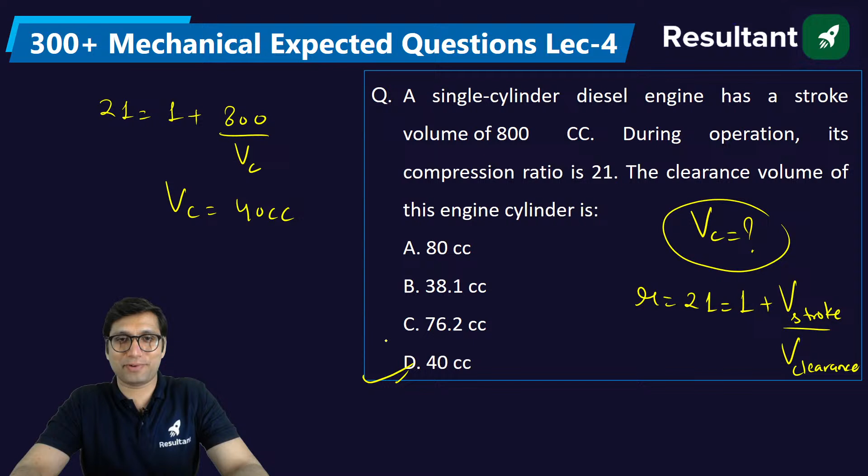But trust me, today I have got really nice questions, really good questions. You will definitely enjoy today's session. The questions I have selected for today's session, in the PPT, are very good - you are definitely going to learn something in today's session.

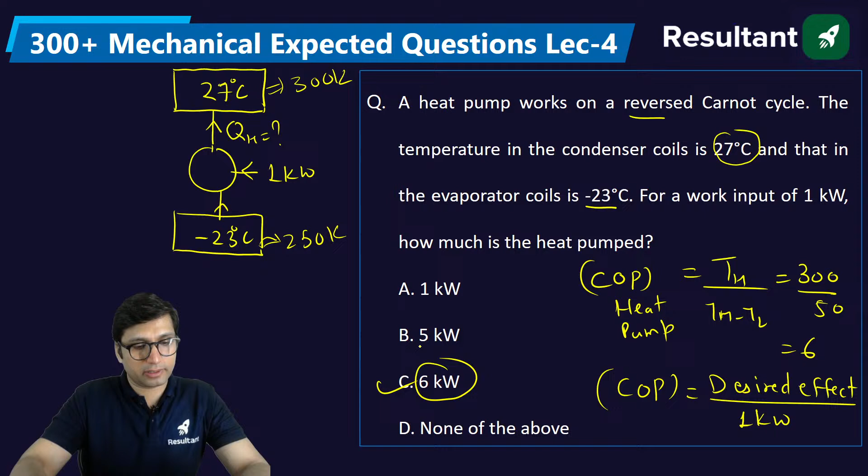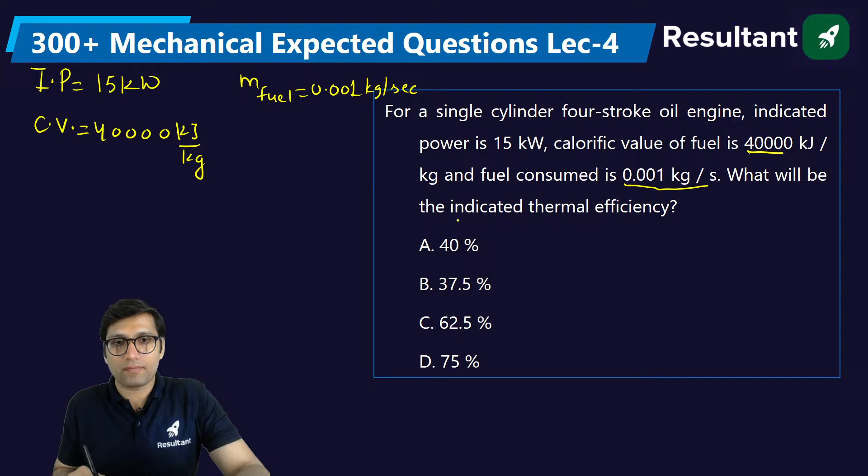What is the indicated thermal efficiency? So how do we solve this question? Indicated thermal efficiency is equal to indicated power divided by mass of fuel multiplied by calorific value.

And I don't feel shy in telling anything to you, because I believe that you should be honest with at least one person in your life, and especially with the students — we should be honest with the students.

So mass of the fuel is 0.001 and calorific value is 40,000. But when you try to solve this question, you will not get the right answer directly — this is in kilojoule per kg, this is in kg per second, this is in kilowatt. Ideally there is no problem in that. If you multiply with 100%, you should get the indicated thermal efficiency. Are you getting this value?

I'm very positive that this platform will grow, and it's a new platform. Students will come to know that classes are being conducted, and slowly this will also grow. I'm very confident about this.

So the answer will be 37.5%.

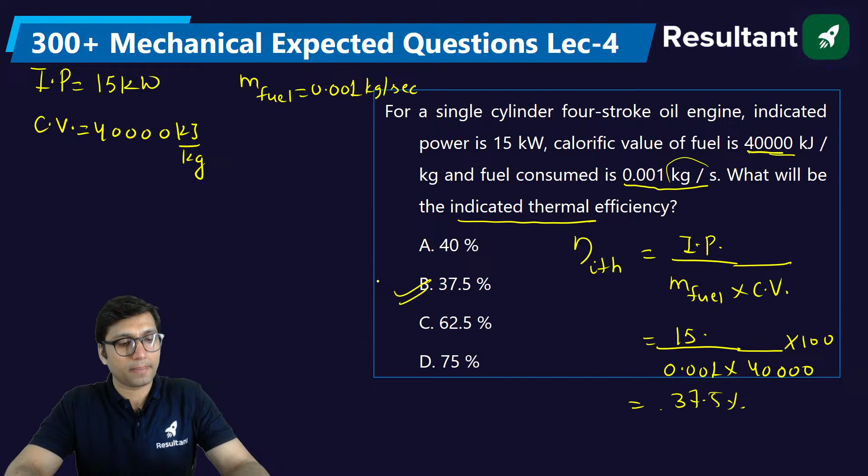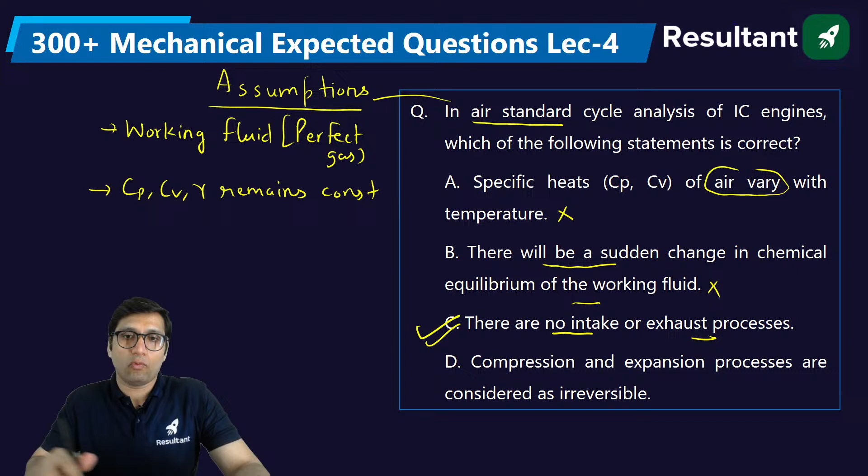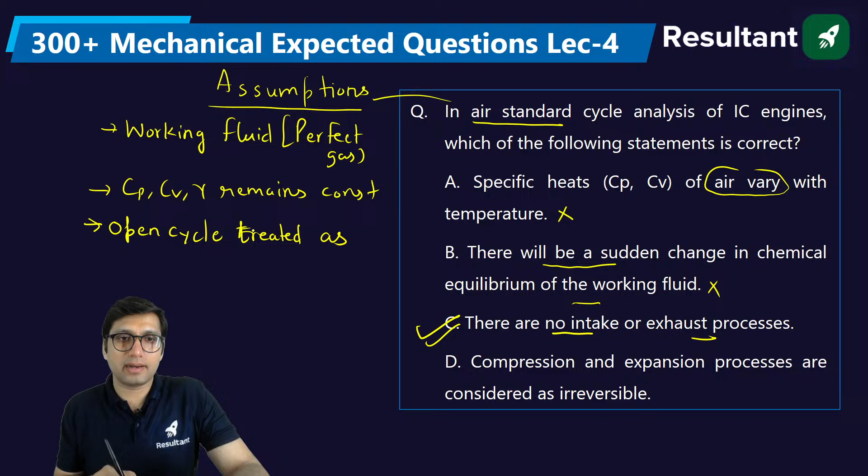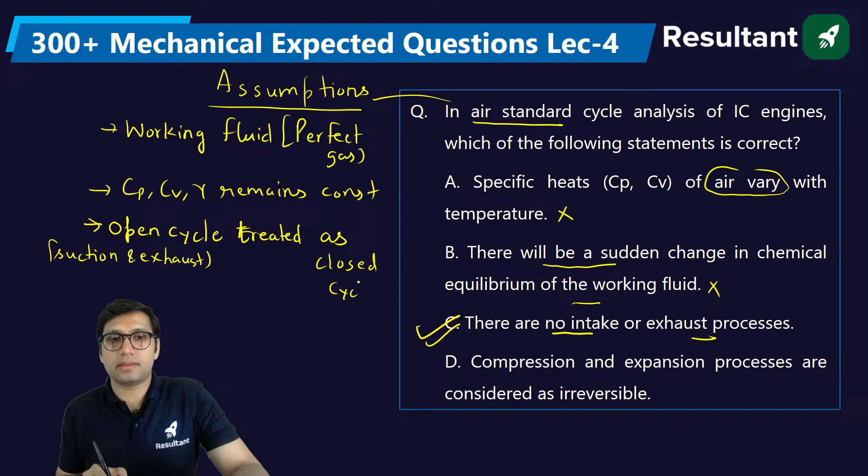There are no intake or exhaust process - yes, intake and exhaust process are not considered here. In the case of air standard cycle, we make an assumption that although the IC engine cycle is an open cycle, it is treated as a closed cycle. That means we will not consider, although in the actual engine there will be suction and exhaust, in the air standard cycle we consider it closed. Open cycle has a process of suction and exhaust, but these processes will not be considered here - treated as closed cycle in the air standard. This is also an important assumption.

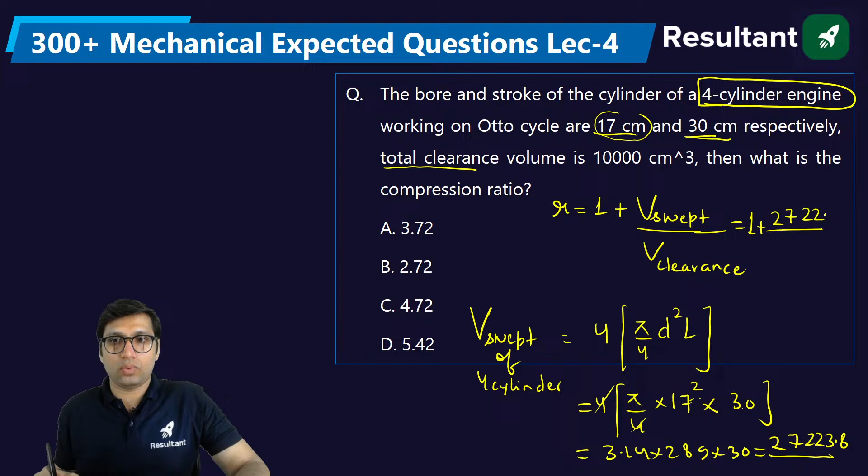Tell me everyone, what will be the value? You will get this value as 27223.8 centimeter cube. So this will be 1 plus 27223.8 divided by 10,000. If you solve it, you will get the answer, which is 3.72.

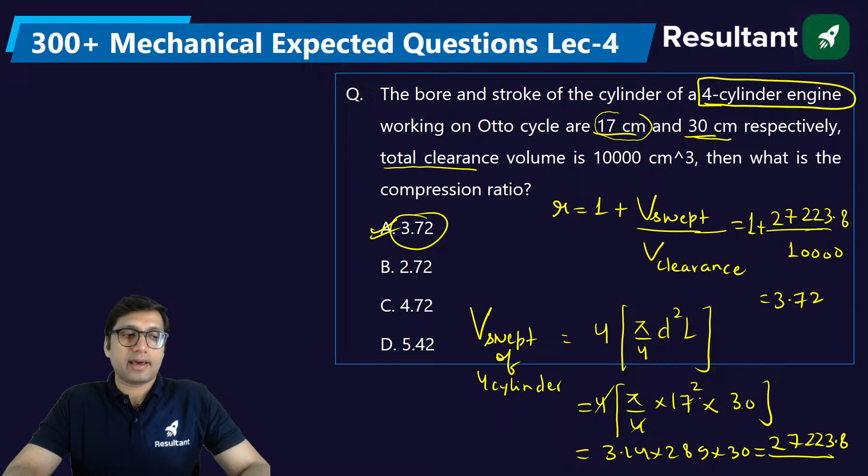For a 1-ton refrigeration plant having the coefficient of performance as 4, what will be the rate of heat rejection by the condenser? You have to find the heat rejected by the condenser.

For 1-ton refrigeration, they are asking you to take 1-ton refrigeration as 3.5. Matlab they are saying you can use it. Most of you already know that 1 ton is equal to 3.5 kilowatt or 210 kilojoule per minute, right? That is the value of 1-ton refrigeration.

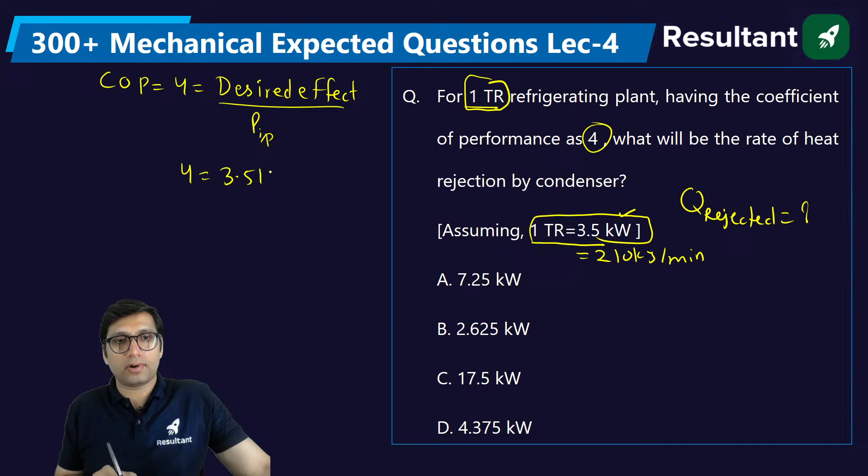For a 1-ton refrigerating plant, the COP is given as 4. What is the rate of heat rejection? So COP is 4, and COP is equal to desired effect, which is refrigeration effect, divided by power input. Desired effect here is 1-ton refrigeration, which is 3.5 kilowatt, divided by power input. First of all, you will get power input from here. Once you get power input, heat rejected is equal to power input plus refrigeration effect. Let's put the values. Tell me what answer you are getting.

Some of you are getting option D. Okay, let me check also. See, if you know about me, I don't do any type of calculation before coming here. Before the session, I don't solve any numerical or any question. I do one thing, I prepare the PPT. So just a second. Yeah, 4.375 is the correct answer. So those who have given 4.375 as the answer, that is absolutely correct.

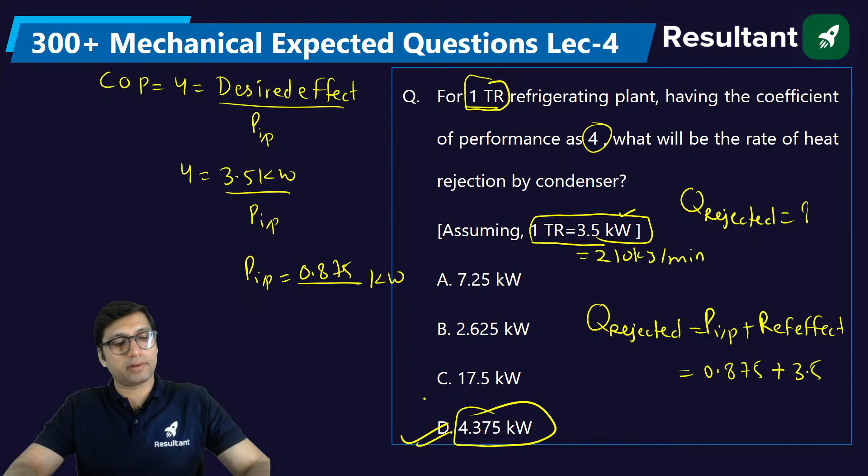Very good, next question. Which of the following increases during sensible heating of the moist air? When we do sensible heating, you will say, sir, what's the problem, you have so many years of experience, even without solving the question you can know. Yeah, that's not a problem, but I have to check, I don't know the right option for sure. I can know the right option for a theory question by seeing the options, but not for a numerical question. I have to solve it. Which of the following increases during sensible heating?

What is sensible heating? In the field of psychrometry, which is a part of air conditioning, sensible heating is the process of increasing the dry bulb temperature at constant specific humidity. When the specific humidity, or moisture, is kept constant, and we try to increase the dry bulb temperature, that is sensible heating.

So what will happen during sensible heating? About relative humidity, you know that simple concept: if it is any kind of heating, the relative humidity will decrease. It will decrease. Here it is asking which of the following will increase, so relative humidity will decrease, so this will not be the answer. Humidity ratio is specific humidity, other name of humidity ratio is specific humidity, and I have already told you that specific humidity remains constant. So this will not be the answer either.

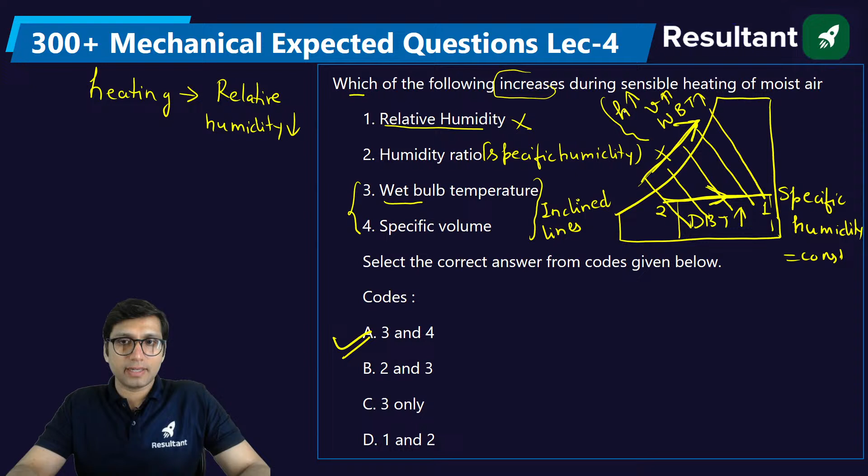And when we are talking about all the properties, why not talk about dew point temperature? If specific humidity is constant, then dew point temperature will also be constant. So this will be the effect on all the properties.

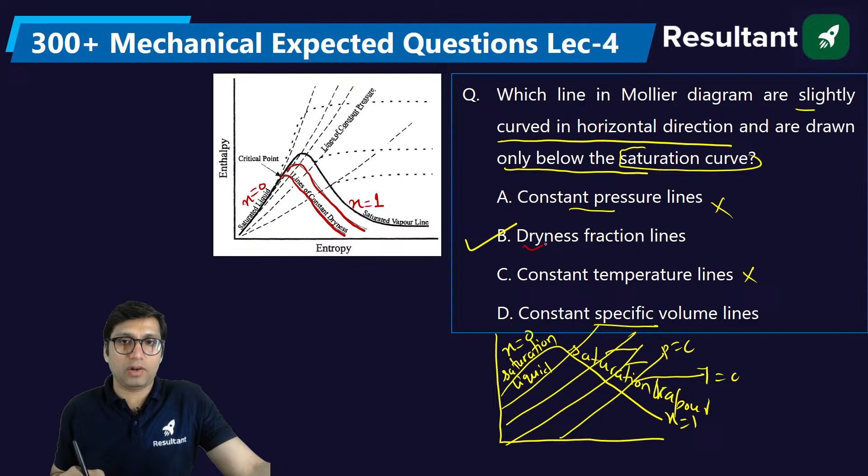So these two will not be the answer. Specific volume lines also extend above, so only one thing is left, that is dryness fraction. If you know the concept, dryness fraction is 0 here and 1 here, so these dryness fraction lines are definitely curved lines. You can see these are the lines of constant dryness fraction. They will only extend below the saturation curve, because the maximum value of dryness fraction is 1, this is the saturated vapor line, and the minimum value is 0. So obviously it will lie below the saturation curve. The answer will be option B.

Which of the following is not an example of forced vortex flow? What is the meaning of vortex flow? You must have seen the formation of these kinds of vortices, there are so many practical examples. You must have seen this formation of vortices in your wash basin also. In the washing machine you find forced vortex, but in the wash basin you will find free vortex.

Very similar to that, which is not the example of forced vortex will be what? Basically they are asking for the example of free vortex. What is free vortex? What is the basic difference between free vortex and forced vortex? What is vortex? The rotational motion of the fluid like this, this is the vortex formation.

What is free? Free vortex means no energy is given, no energy is supplied for rotation of the fluid. This rotational motion, which is in the form of a spiral, happens with no energy supplied. But in forced vortex, some external energy or external work is required and supplied for creating the vortex. It will not happen naturally.

Now of all the options given: the flow of liquid inside the impeller of a centrifugal pump, this is forced vortex. The liquid contained in the cylinder rotated about its axis, because the cylinder is rotated, this is also forced vortex.

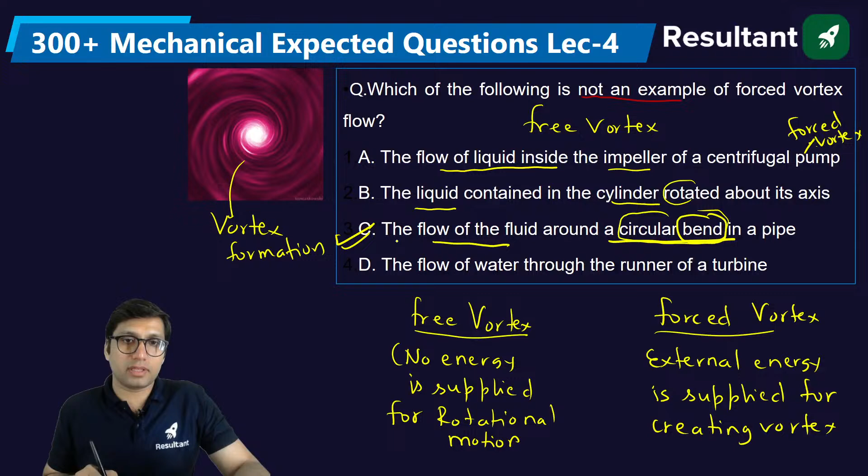Flow of water through the runner of a turbine is forced vortex. If the specific heat of dry air and water vapor are 1 kilojoule per kg Kelvin and 1.88 kilojoule per kg Kelvin, and the humidity ratio is 0.011, then the specific heat of the moist air will be?

The moist air is basically the sum of dry air and water vapor. It is composed of two important constituents: water vapor, which is known as moisture, and dry air, which is normal air. Now you must have read this formula for finding the specific enthalpy of the moist air.

You must have seen this formula: specific enthalpy of dry air plus specific humidity into 2500 plus 1.88 into dry bulb temperature in degree Celsius. Dry bulb temperature has to be kept in degree Celsius, but this is the formula for finding the specific enthalpy of the moist air.

But here they are asking for the specific heat of the moist air. The specific heat of the moist air will be somewhat like this: specific heat of dry air plus specific humidity into specific heat of water vapor. Actually, this formula for specific enthalpy of moist air can also be written as specific enthalpy of dry air plus specific humidity into specific enthalpy of water vapor, it is very similar to this.

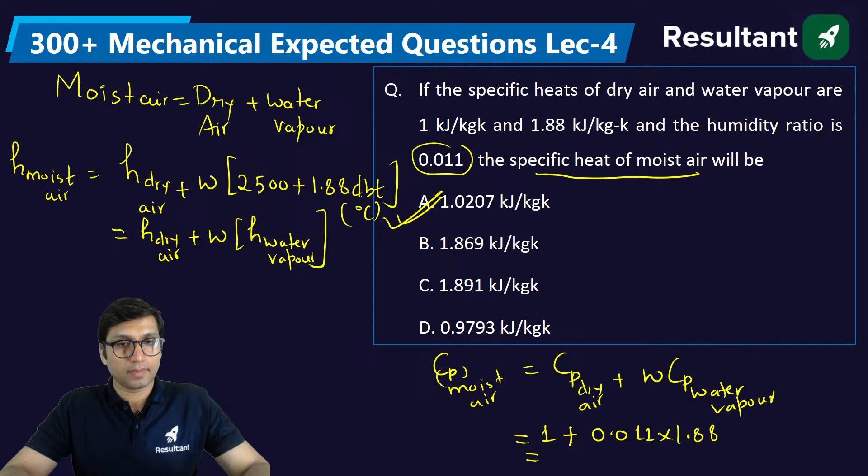Next question. Which of the following statements are correct when related to thermodynamic system?

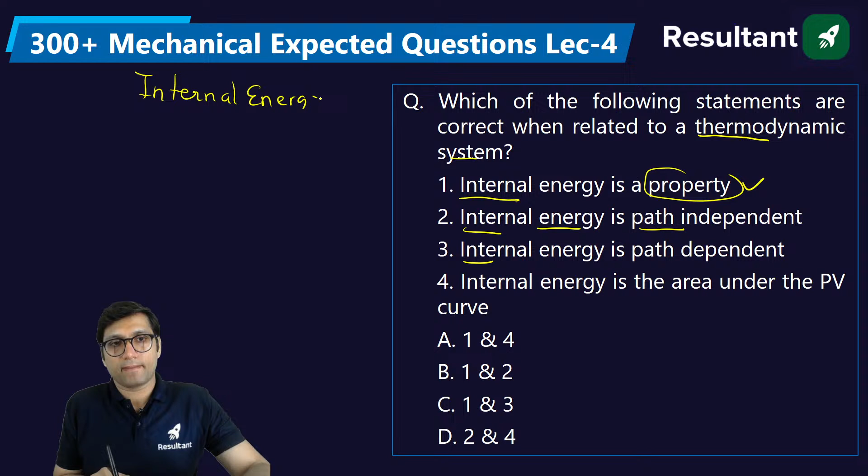For a thermodynamic system, they are talking about internal energy. We all know internal energy is a property. Yes, correct, internal energy is path independent, because internal energy is not a path function, it is a point function or state function. It depends only on the initial and final states. It does not depend on the path followed by the system.

For example, if you see a pressure volume diagram, let's say there is a process 1 to 2 through path A, and also process 1 to 2 through path B. If you find the change in internal energy for path 1A2, it will be U2 minus U1. If you find the change in internal energy for path 1B2, it will also be U2 minus U1. It is not dependent on the path, only on the initial and final points, so it is path independent. The answer will be 1 and 2, option B. Clear?

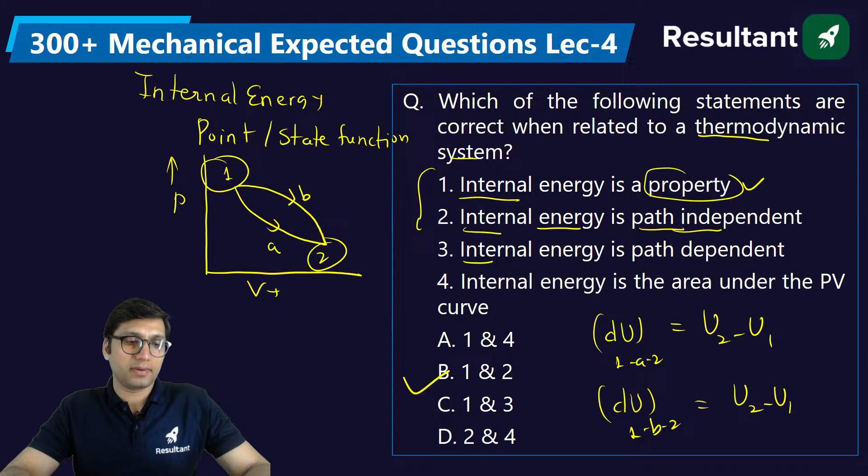Path dependent properties are not properties. Path dependent quantities are heat and work. They are path dependent, and they are determined by the area under the PV curve. Work is determined by the area under the PV curve.

Air is cooled sensibly from 40 degrees Celsius dry bulb temperature and 29% relative humidity to 24 degrees Celsius dry bulb temperature. What will be the bypass factor of the cooling coil if the surface of the cooling coil is maintained at a temperature of 20? This question may look a little tricky because of the kind of data given. But it's not confusing, my dear, this is a very simple question.

We are having a cooling coil, and when air at an initial temperature of 40 degrees Celsius passes through the cooling coil, its temperature gets reduced to 24 degrees Celsius. The temperature of the coil is 20 degrees Celsius. So whenever you have to find the bypass factor of a cooling coil, obviously the highest temperature will be the inlet air temperature, the exit temperature will be the second highest, and the lowest temperature will be the coil temperature.

Bypass factor of the cooling coil will be T2 minus temperature of the coil, over T1 minus temperature of the coil. Just solve it, you will get the answer. Tell me what value you are getting. Are you getting option A, 0.2? Okay, so this is the bypass factor.

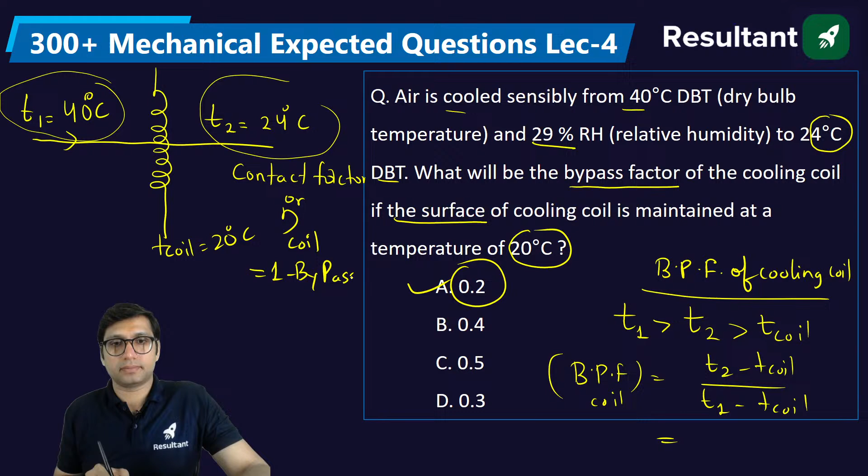But what if they ask you the value of contact factor or coil efficiency? If they ask you the value of contact factor or efficiency of the coil, that is equal to 1 minus bypass factor. Remember this.

Now if you see this diagram, there is a shear stress and velocity gradient curve given here, with different names of different types of fluid: Bingham plastic, ideal fluid, shear thickening fluid, pseudoplastic, thixotropic. Now the question is, you have to match the following. If I were at your place, I would directly say this is thixotropic because I know the answer, this is dilatant, this is Bingham.

And if you are able to match from this diagram, then it's fine. C will be 1. Where is C1? That is this. These two will be the answer, so options C and D will not be the answer because Bingham plastic is this. Shear thickening fluid is dilatant. Dilatant is shear thickening, B is 3, so option A will be the answer.

But my dear, shear thickening is dilatant, dilatant is shear thickening, and pseudoplastic is shear thinning. Thixotropic is time dependent shear thinning. It is also shear thinning, but time dependent shear thinning.

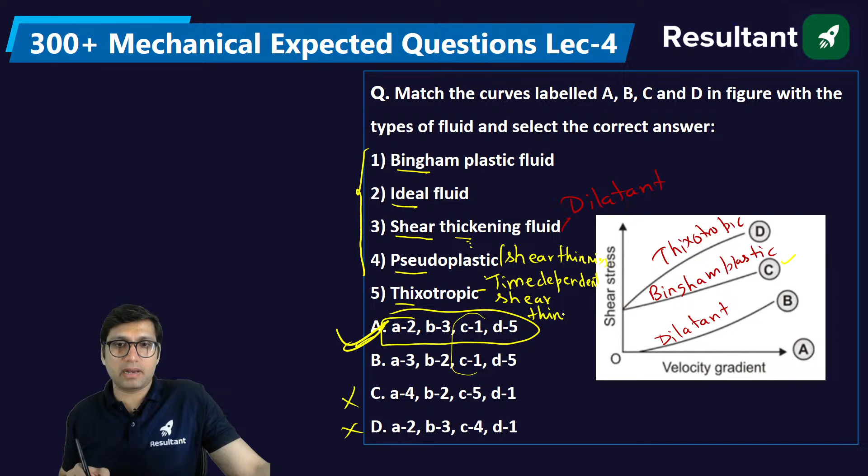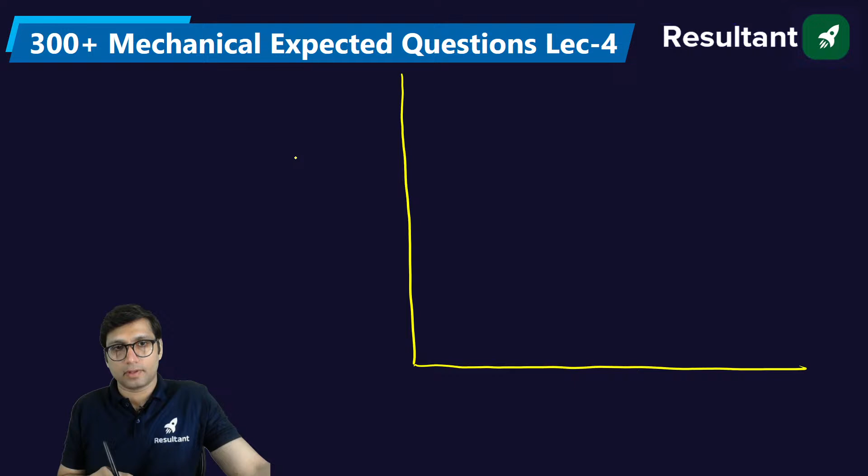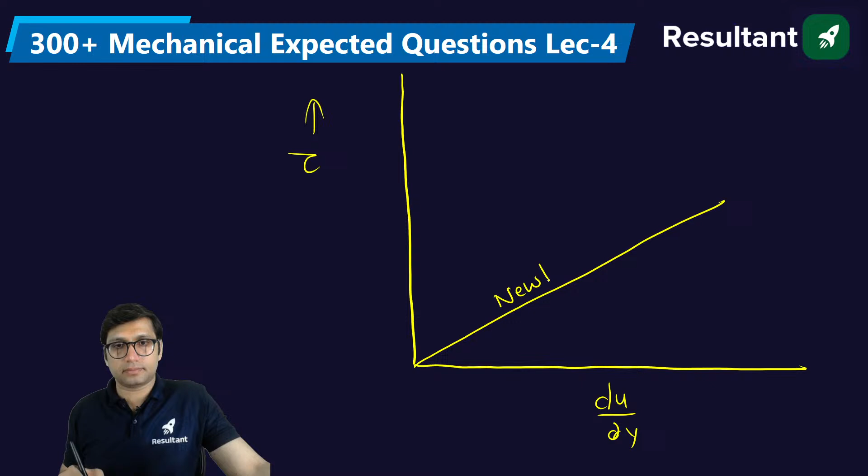So let me draw a diagram of all the fluids here: shear stress and velocity gradient. This curve is Newtonian fluid, it will be a curve like this. For Newtonian fluid, N will be equal to 1 and B will be equal to 0. What is B? I will tell you after some time. This is dilatant, for dilatant N is greater than 1, and this is pseudoplastic.

Pseudoplastic, N is less than 1. Pseudoplastic is shear thinning. Now, from this point up to this point, this is B. B is nothing but this is called yield stress.

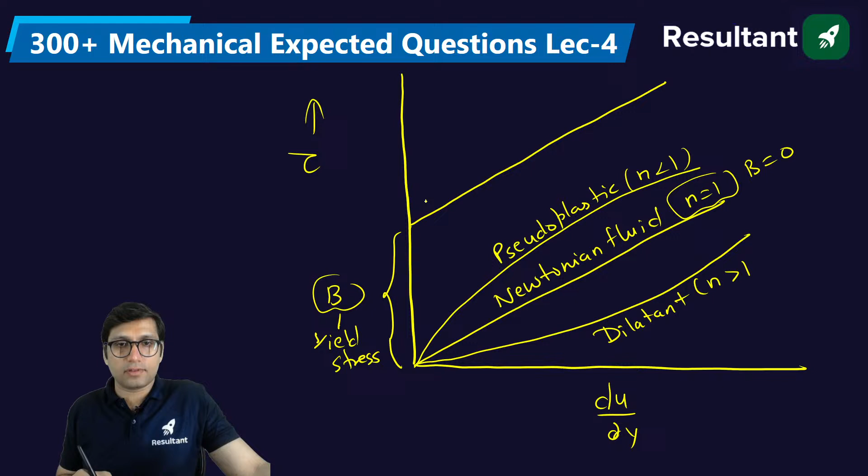This is the minimum yield stress required. This is Bingham plastic, ideal plastic. There are two more curves here: this is thixotropic and this is rheopectic.

For rheopectic, n will be greater than 1, but B is not equal to 0. Here B is equal to 0, B is equal to 0, B is not equal to 0 and n less than 1. Clear? For Bingham plastic, B is not equal to 0 and n equal to 1. So this is the behavior of all the curves I have shown over here.

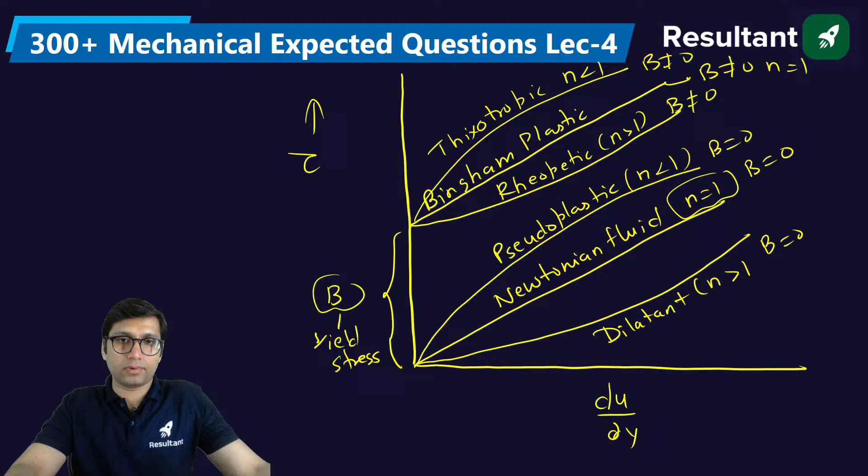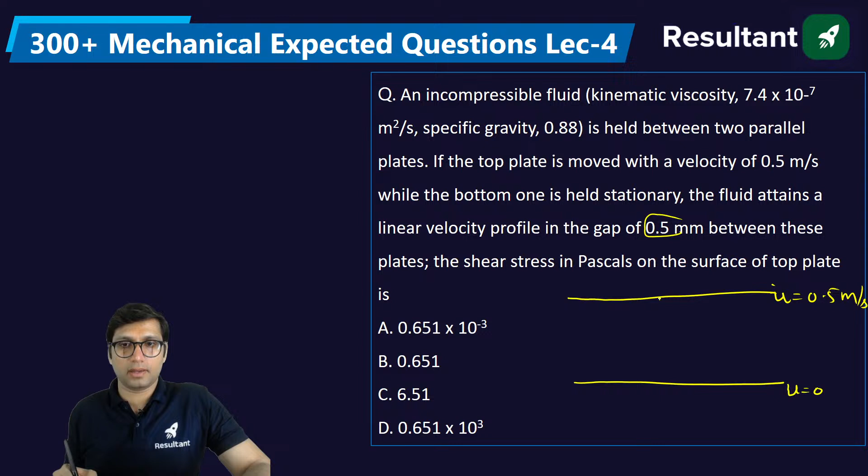Next question: an incompressible fluid, kinematic viscosity and specific gravity given, is held between two parallel plates. The top plate moves with a velocity of 0.5 meter per second, while the bottom one is stationary. The fluid attains a linear velocity profile in the gap of 0.5 mm between these plates. So basically we have two plates, the top moving at 0.5 m/s, the bottom stationary, with a distance of 0.5 mm between them.

You have to find the shear stress. Shear stress can be determined by mu du by dy, a simple formula. Here they have given kinematic viscosity and specific gravity, and you know shear stress is equal to kinematic viscosity into density into du by dy. What is density? If the specific gravity is 0.88, density will be 880 kg per meter cube.

Kinematic viscosity is given, everything is given, just put the values. Du will be the difference of the two velocities, 0.5, and dy will be 0.5 times 10 to the power minus 3 meter. Just put all the values here and tell me the answer. Okay, very simple question.

I'm also solving the question because, as I told you, I don't solve the question before coming to class. So just give me a few seconds. Maybe your speed will be better than mine because I usually don't solve these questions.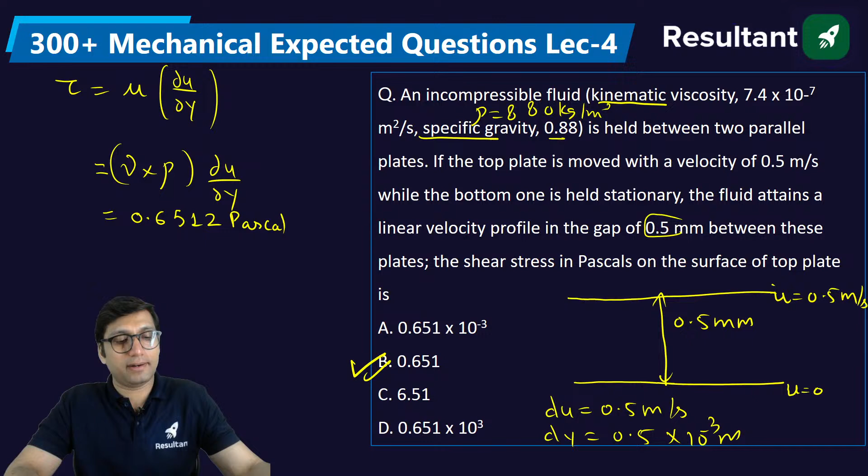It looks like some students have left the YouTube session. Maybe they have other appointments, maybe dinner with a loved one, or a phone conversation, or something more important. But those who have stayed for 44-45 minutes, thank you so much. It's a free session, it's your free will to come or leave, I can't stop you. But we give 1 hour to these sessions, and for mechanical only one session is conducted in a day, at 8 p.m., a time suitable for all types of students, whether working, in college, or preparing full time. Even after that, if you can't continue studying for 1 hour, God knows what you guys want to do.

Two Carnot engines working between the same temperatures of 600 and 300 Kelvin employ two different working fluids. Sometimes questions look like they have written so many complicated things to make it seem difficult. One uses a fluid of specific heat 2.302, the other uses 3.2305. When you first read this, you think let me do some calculation, but if you use your brain you'll see the key fact.

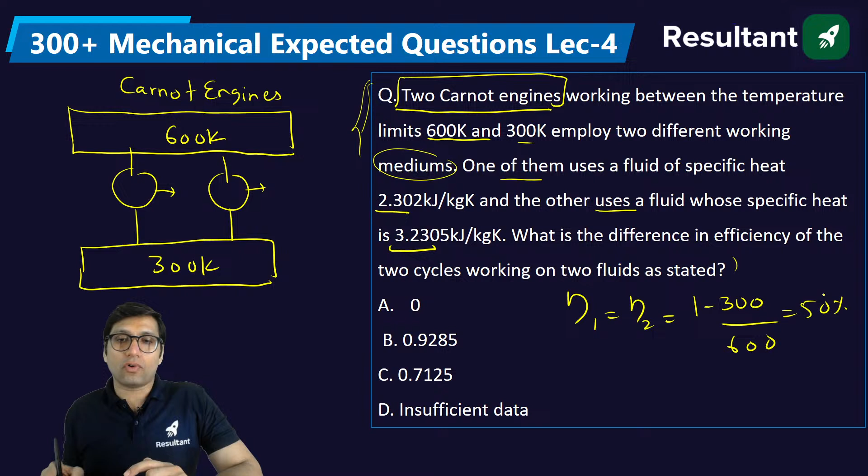Both are Carnot engines working between the same temperature limits of 600 and 300 Kelvin. If both are Carnot engines, their efficiency will be 1 minus 300 by 600, which is 50% for both. So what is the difference in efficiency? The difference in efficiency will be 0. That's a simple concept.

The velocity component in the x and y direction are given by... let me just write it here.

U is equal to lambda xy minus xy square. Okay, some mistake was there. And v is equal to x square y minus 4y cube.

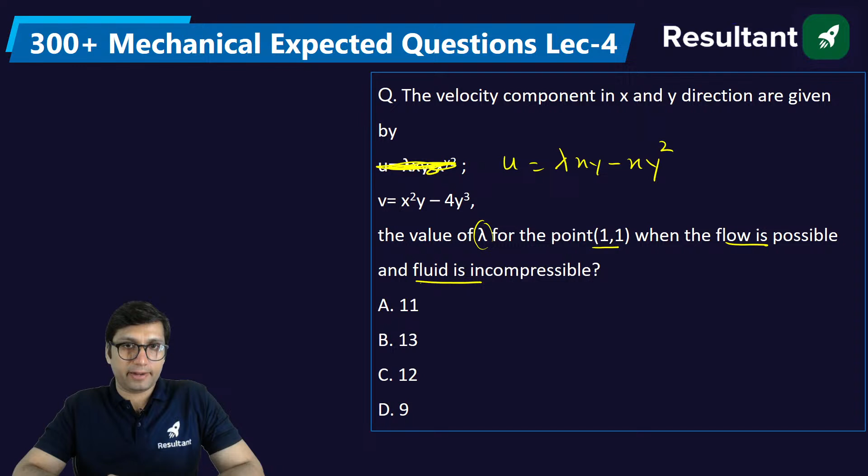The value of lambda for the point (1,1) where the flow is possible and the fluid is incompressible, you have to determine. So when can we say the flow is possible for a two-dimensional fluid where the velocity is varying in x and y direction? This is only possible if the continuity equation is satisfied. Continuity equation, you know continuity equation? If it is satisfied, which is del u by del x plus del v by del y equal to 0.

Only thing you have to do here is del u by del x will be, tell me, it will be lambda into y minus y square. Del v by del y will be x square minus 12y square.

And here they are saying if you put (1,1) means x is equal to 1, y is equal to 1 at these points. At these points, del u by del x will be lambda minus 1. Del v by del y will be 1 minus 12. So just put the value, you will get del u by del x is lambda minus 1 plus 1 minus 12 equal to 0. This will get cancelled out. You will get lambda is equal to 12. Okay, clear?

Subhadeep, how are you getting option B, 13? Some calculation mistake again? Please see your calculation, check. Okay.

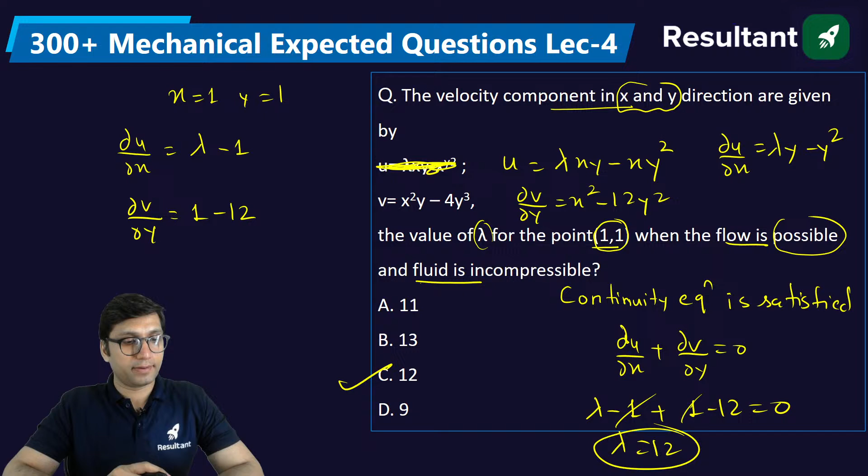All right, following statements are made regarding Bernoulli equation to be applied between any two points along a streamline. Which of these is or are correct? The flow is steady and compressible. The flow is steady, incompressible, and curl of velocity is non-zero.

Bernoulli equation, see, Bernoulli equation and its assumptions are important for your exam point of view. Okay, Bernoulli's equation assumptions. The first assumption makes it quite clear that it should be ideal fluid, and if it is ideal fluid, the flow is inviscid, the flow is irrotational, the flow is incompressible.

All right, can you see anything like that here? Also steady, ideal fluid is also steady. So the answer is steady, incompressible, and irrotational. I think only one option is there. Curl of velocity is non-zero. See, curl of velocity, if it is not equal to 0, the flow will be rotational. Clear? Any confusion? So the answer will be here only R.

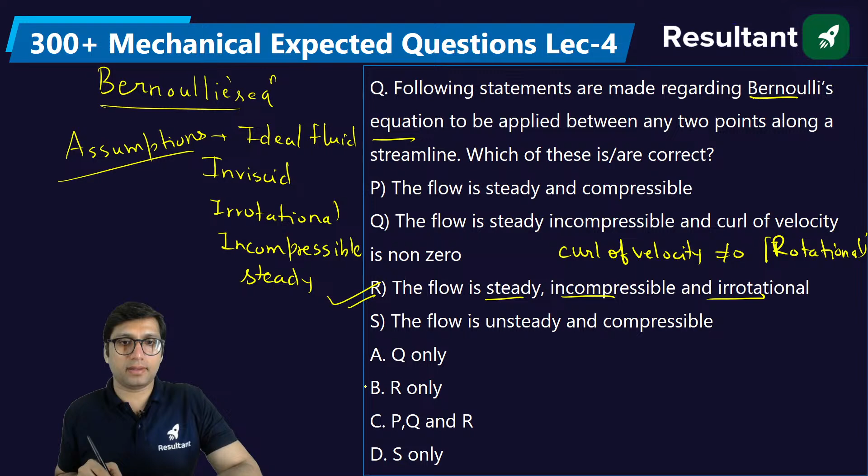Only B. In order to avoid tendency of separation at the throat in a venturimeter, the ratio of diameter of the throat to the diameter of the pipe should be. This is a database question, fixed database question. If you know the answer, then you can definitely answer the question.

Database question. Whenever you find this kind of question, you should have studied before. The answer is 1 by 3 to 1 by 2. That is in order to avoid separation. Which separation are they talking about? Boundary layer separation. In the Venturi meter, in order to avoid separation of the fluid, one thing you require is the angle of divergence should be less than 7 degree.

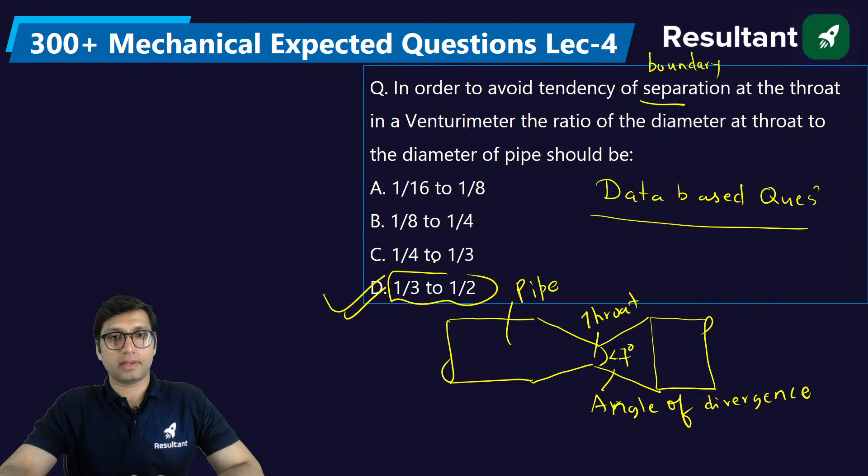Angle of divergence in the divergent part of the Venturi meter should be less than 7 degree. And second thing is that the ratio of the diameter of the throat to the diameter of the pipe should be 1 by 3 to 1 by 2. Next question, you can check that. Okay, this is a database question. This is a very nice question, and

I want all of you to take a few seconds to firstly understand the question, understand what is given, and then try to solve it. A cylindrical body of cross-sectional area A, height h, and density rho s. Here I was not getting the symbol for rho, so this, it is denoted by P, but it is rho. Rho means density. Here it is representing density.

It is immersed to a depth h in a liquid of density rho and tied to the bottom with a string. Clear? So there is a cylindrical body placed in a liquid, and at the bottom it is tied to the bottom of the container with a string. Clear? Understood the question? If you understood the question, tell me what is being asked. The tension in the string. How can you solve this question?

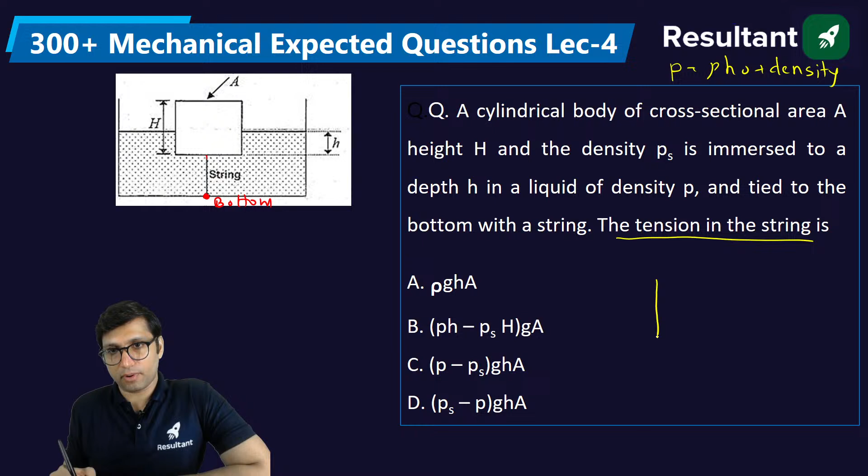This question may look very tough to you, but it's not so tough. First of all, you need to understand this cylindrical body will be having a tension. Now, what is the direction of tension? First of all, what is the direction of the weight? Direction of the weight will be in this direction. Weight of the body will be acting in the downward direction.

What will be the direction of the buoyant force? The buoyant force will act in the upward direction. Now what will be the direction of the tension force? Will it be in the same direction or the opposite direction?

See, if the string is stretching, you realize the string will try to stretch in this direction, but actually on the cylindrical body, the tension will act in this direction. This is the free body diagram of the cylindrical body.

Now, if the tension is in the downward direction, you can say tension T will be equal to buoyant force minus the weight of the body. Correct? Tell me everyone, is it correct or wrong?

What is the weight of the body? Weight of the body will be equal to density of the body, rho s, into g into height of the body, into H into A.

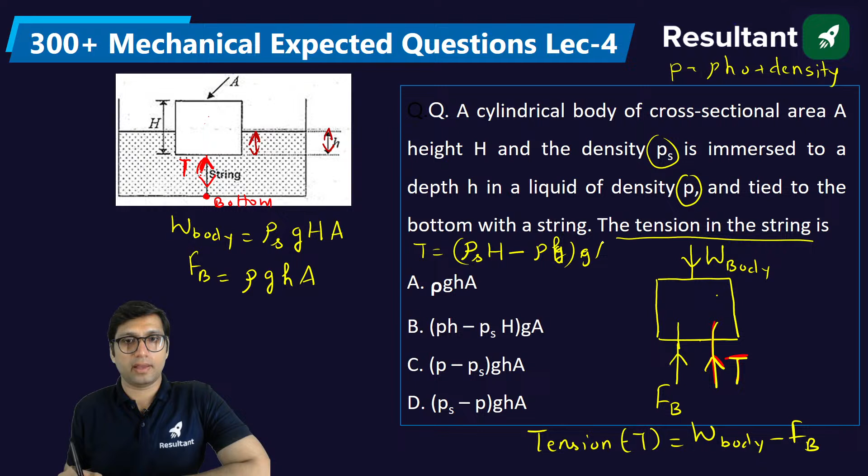So the tension will be equal to rho s into h minus rho into g into, sorry, rho into h into g into A. This should be the answer, but I think there is some mistake.

Either I have done some mistake, or the string will try to stretch in this direction. So as per this, I think the direction of tension should be in this direction, taken in this direction. So we'll say tension acts in both directions.

So we can say the buoyant force is equal to tension plus weight of the body. So tension will be equal to buoyant force minus weight of the body. So if this is the answer, it becomes just the opposite: rho into H minus rho S into H. The answer will be option B. Is it clear to everyone?

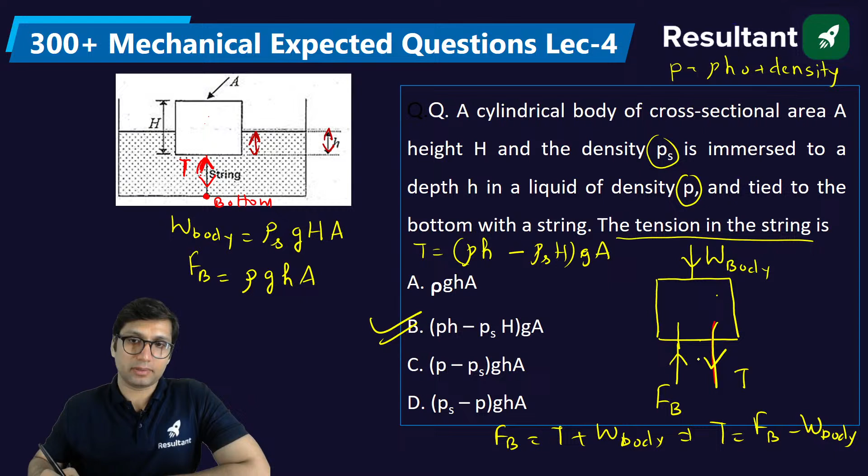Yes, tension will be taken away from the body. Maybe I have not studied mechanics in a long time, so I made a little mistake here. So tension will be taken away from the body, this is a mechanics concept, away from the body.

Very good, next question. A manometer measures the pressure differential between two locations of a pipe carrying water. If the manometric liquid is mercury having a specific gravity of 13.6 and the manometer showed a level difference of 20 centimeters, then find the pressure head difference of water between the two tappings. It's a very simple question.

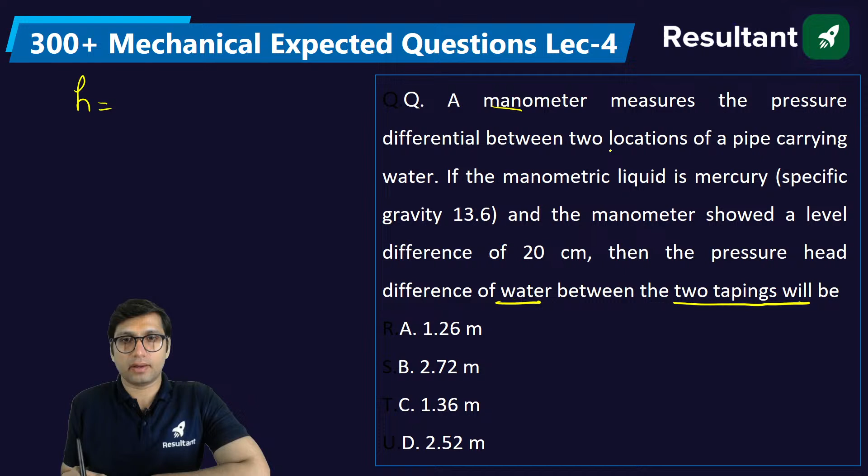The pressure head difference is equal to, since here we have two types of fluid: one is the manometric fluid, mercury, and the other fluid is water. Water has a density of 1000 kg per meter cube and a specific gravity of 1. Since the specific gravity of the fluid in the pipe is less than the specific gravity of the manometric fluid, we'll apply this formula.

H will be equal to X, specific gravity of the manometric fluid by specific gravity of the fluid in the pipe, minus 1. Just put in the values and we'll get the answer. X is 20 centimeters, 0.2, times 13.6 by 1 minus 1. Solve it and you'll get the answer, 2.52 meters.

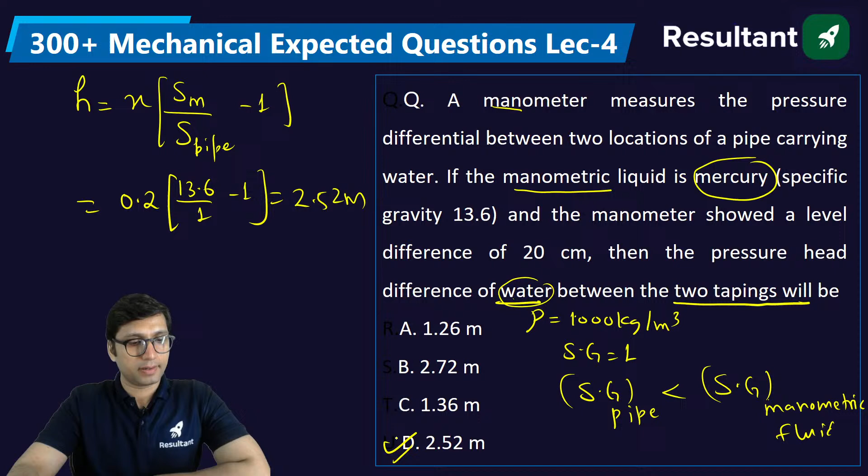Next question, a very similar type of question. The pressure difference measured by a mercury-oil differential manometer on the two sides of an orifice meter gives a reading of 50 centimeters of mercury. Determine the differential pressure head in the orifice. Take the specific gravity of the oil as 0.9.

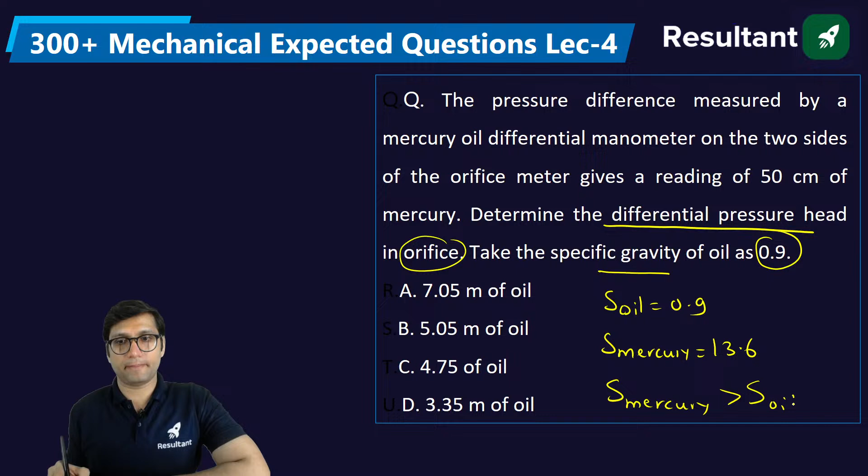Here the specific gravity of the oil is 0.9 and the specific gravity of mercury in the manometer is 13.6. Again, the specific gravity of the manometric fluid is greater than the specific gravity of the oil, so the formula will be the same. It is X, 0.5, times 13.6 by 0.9 minus 1. Solve it and get the answer.

What will be the answer for this question? Tell me, everyone.

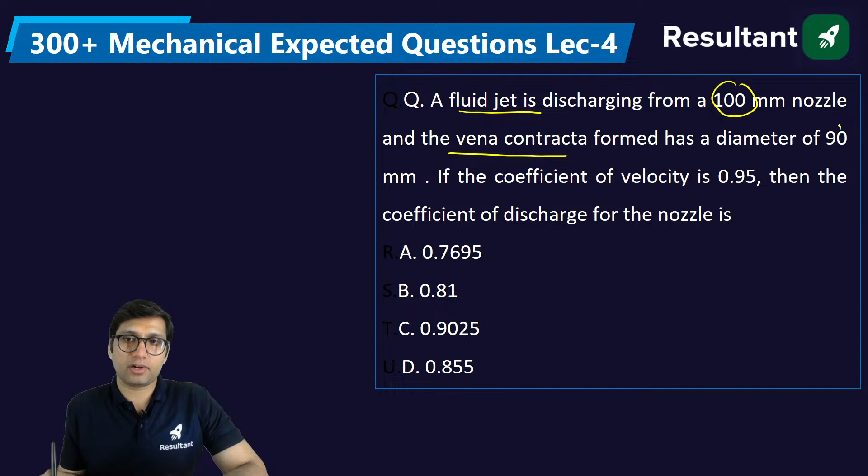A fluid jet is discharging from a 100 mm nozzle and the vena contracta formed has a diameter of 90 mm. If the coefficient of velocity is 0.95, then the coefficient of discharge for the nozzle is?

Coefficient of discharge is equal to coefficient of contraction into coefficient of velocity. You know this formula, right? If you have to determine CD, it will be equal to coefficient of contraction into 0.95. Now the problem is how to find the coefficient of contraction.

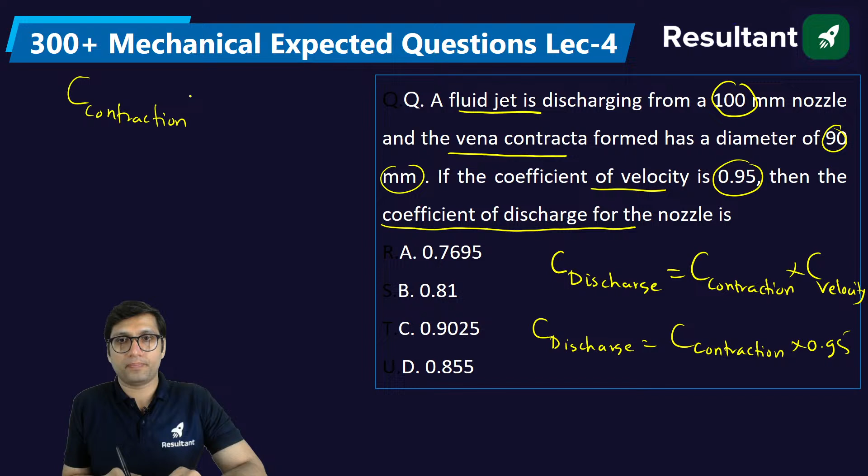Coefficient of contraction is equal to area of the vena contracta, which is the actual minimum area, to the theoretical minimum area, which is the area at the exit of the nozzle, that is area of the nozzle. Area you can find as pi by 4 d square of the vena contracta, divided by pi by 4 d square of the nozzle.

So this will get cancelled out. You can simply write it as 90 by 100 square, which is 0.81. So 0.81 into 0.95. Simple, you will get the answer. What answer are you getting? 0.7695. So that's the last question for today's session.

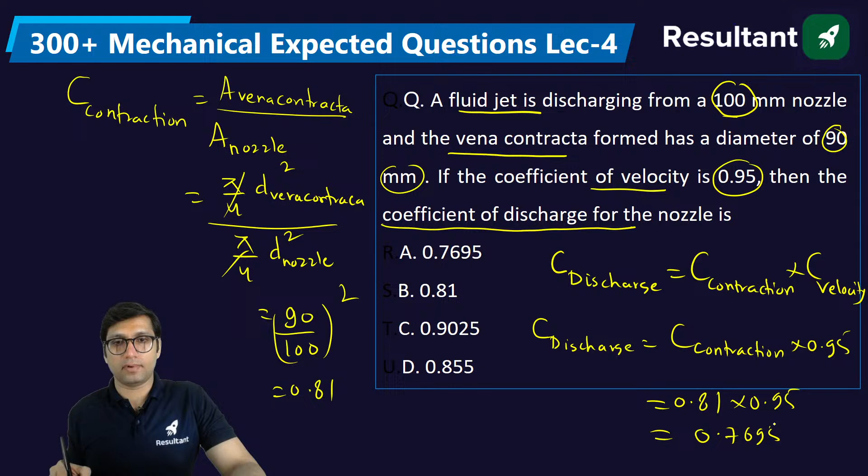Rest of these questions will be taken care of in tomorrow's session. So I want to tell you this very important thing here.